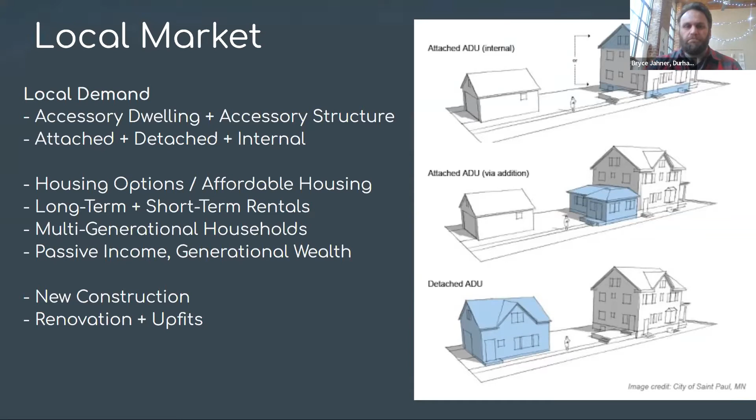So in our area, we've seen some barriers that we've had to overcome. I mentioned the zoning and the planning. One particular aspect that absolutely crushed our ability to do ADUs here was the way that the plumbing and the electrical could or could not attach to the main house. Used to be that it had to go have its own independent hookup at the street, which was an insurmountable bill right at the beginning of the build.

So now we have the ability to tap into the sewer of the house, and we also have the ability to just put a sub meter on the main electrical meter. So then the only upfit that might be necessary is getting a better panel if it's a particularly old house.

Our area also experienced really low demand right in the beginning, because there were very few people who knew what an ADU was. We also found that supply chain was a real big problem, getting just one product here, one product there, one door, just a singular single supply chain implement, I guess, along the way.

We also found that it was really hard to get our skilled labor force involved for such small projects. They were charging full infill housing prices for small, teeny little jobs, and that was really hard to get them on board in the beginning.

The other big option, and this is why I'm kind of excited for the next person to speak as well, is limited financing options. I think most banks have a real problem handling what the appraisal of a house looks like, or an accessory looks like in conjunction with the house.

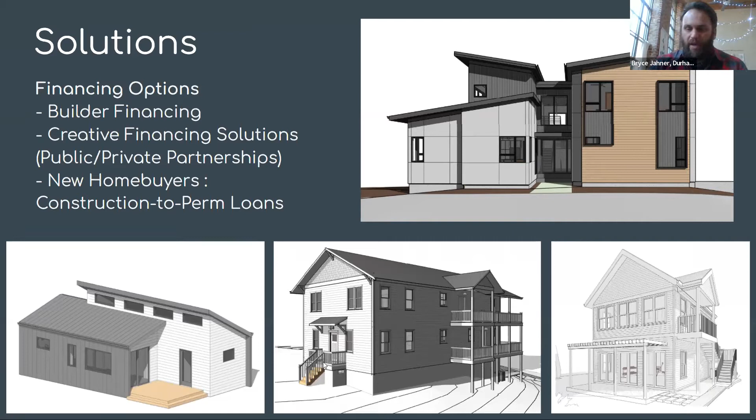This is the one that everybody at the beginning of the pandemic started to ask for, and is really, I think, probably our most in demand. I have a slide about it later, so I'll come back to it. Oh, it's the next one.

What makes this unique and so valuable is that it's a space that can be rented to a grad student, or in our area, a traveling doctor. It's also a space that's accessible to the couple who own the primary structure. So the first floor is a workout room. It could be an office. It could be a flex space for kids, a schoolroom. But then the top floor is a 1-bedroom, 1-bath.

That 1-bedroom, 1-bath really is what's in most demand in our area. We're finding it to be a much easier hill to climb to convince people that that's of value, especially people who live within a few miles of a school or a downtown urban corridor. But having that accessory space for their own private use really is something that everybody has latched onto and really, really loves.

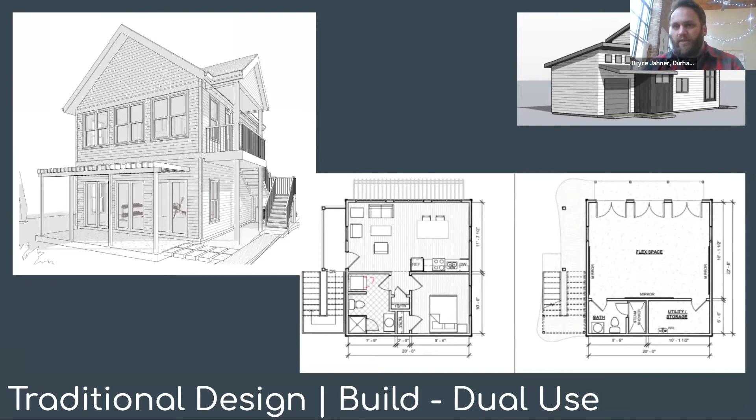In the upper right is an example of that, where somebody wanted to work in that space. On the left, she has her artist studio with a nice roll-up door to get the light in. But on the right, not one over the top but side by side, is the rental unit. That's an example of how that can look in a different format.

This is an example of one of our public-private partnerships. The city of Raleigh had some vacant land that they sold for $1 to a builder. We won that partnership with them, and now are building what's actually going to be 9 duplexes. The original intent was 8 duplexes, but it's now 9, all of which include an ADU built into them, typically off the back of the unit.

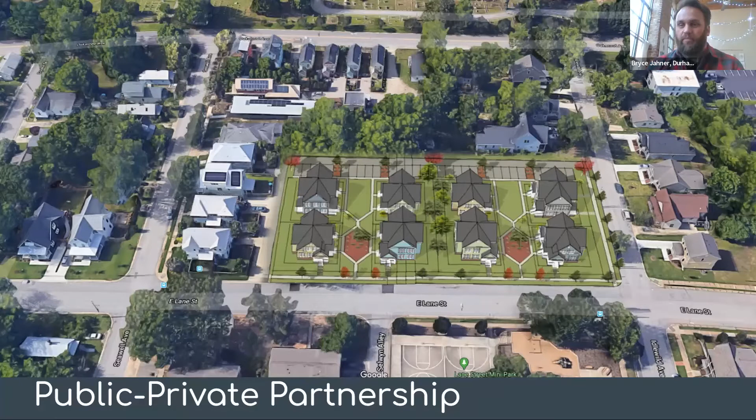This type of partnership makes land acquisition much more tenable, but also helps us produce these units or rent them at an affordable rate. We also work in conjunction with one of our area land trusts so that this is in a permanent affordability zone. This is another example of a partnership to remodel a structure rather than build one brand new.

This was a disaster house. It was in pretty rough shape. We partnered with an area nonprofit who houses homeless women. We got funding from the city and matched that with grant funding, and were able to add an ADU on this site for an in-house permanent supportive employee. Then 7 other rooms in the house are now currently housing women who are coming out of homelessness.

So it has a large kitchen for everyone to use, but has a separate kitchenette in the ADU. It separates it for security reasons, but also so they can have somebody living on site full time rather than off site just checking in every once in a while. This was one of our first ventures into what renovating a home with an ADU that didn't traditionally have one looked like.

In terms of the missing middle, this is housing that really maximizes density on a property without having to go through commercial or multi-level developments. All of these front lots are considered small lots in our area, which is something we recently passed zoning on so we can develop these smaller lots, all of which include an ADU on the back.

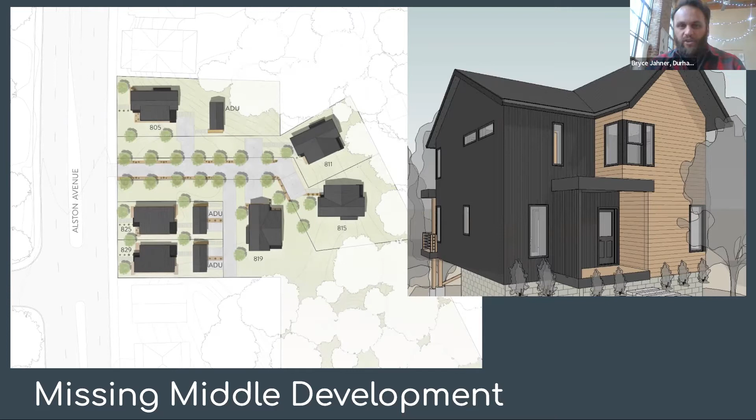Now these are ADUs that are modular developments, so we build them off-site and bring them on-site. I'll talk more about why that's a benefit later, but these are examples of ADUs put onto small urban developments.

Here are some other examples of ADUs in our area. The one on the top right is more of a luxurious ADU, a 2-bedroom, 2-bath with a screen porch and a nice fireplace. This is substantially nicer than the primary structure in front of it, but the couple who own the house are going to move into this structure and rent out the house in front. They really wanted to push the limits of how great this space could be and how maximized it could be in square footage and usage.

And the lower left is another example of an accessible unit. This is 2-bedroom as well, and includes a lot of extra amenities for someone in a wheelchair or a senior.

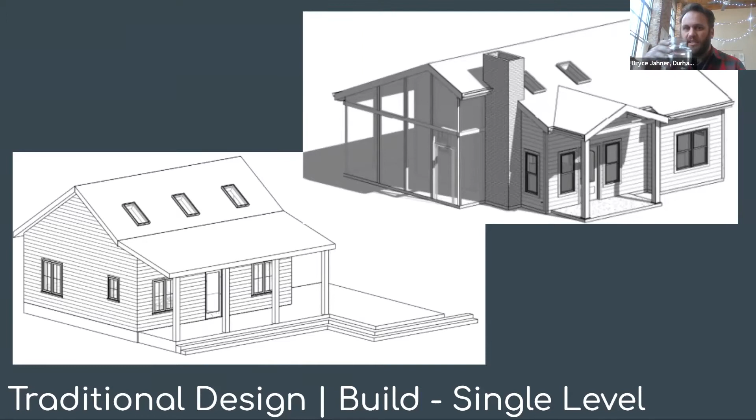This is sort of a hot button issue, I guess, but is another solution for accessory spaces, and from a builder's perspective is actually really easy: a tiny house on wheels. A lot of areas don't allow for these because they can't figure out how to not make trailer parks happen in their zoning without allowing for these as well.

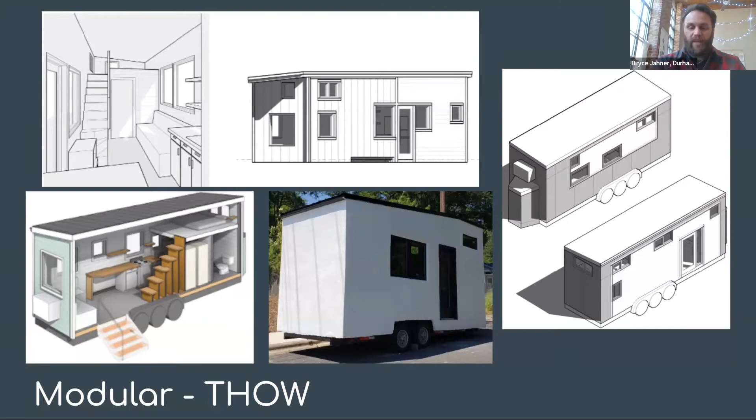But on the West Coast, up in the Rocky Mountains, in Maine, Vermont, these are wildly popular. And as we see more TV shows that talk about these, I think they're becoming a great solution especially for younger people and singles. We've built several of these. They're really low barrier, low cost options, and can be a great solution especially for small backyards and rural areas. You see a lot of them in rural areas.

Modular was a solution for us because one of the more common problems people have with ADUs is that you're disrupting their space—disrupting where they live to build this, whether it's 5 months of digging up someone's backyard, spending time in someone's basement, or moving through their space up to their attic. A lot of people find that to be a barrier for themselves.

So modular units are developed in a factory and then shipped to the site. They custom build a little trailer, we drive it in, set it down, and basically walk away. We're only on site for less than a month.

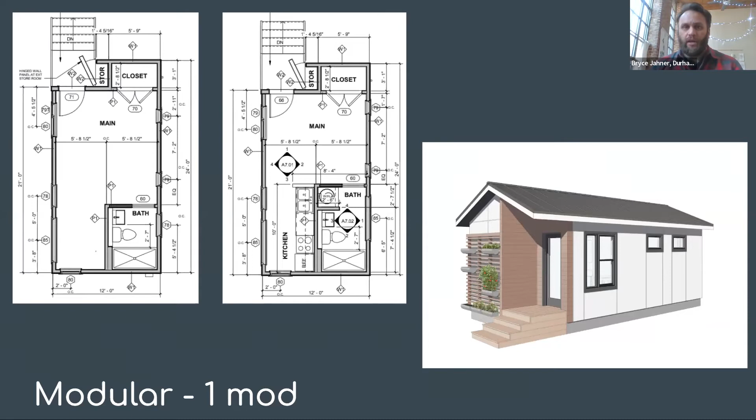There may be modular developers in your area. I know Indiana is sort of a hub of modular development, so there are probably a lot of companies that will come into Kentucky. This is something to consider as a really quick, easy, turnkey solution without having to go through the headache of doing a new build.

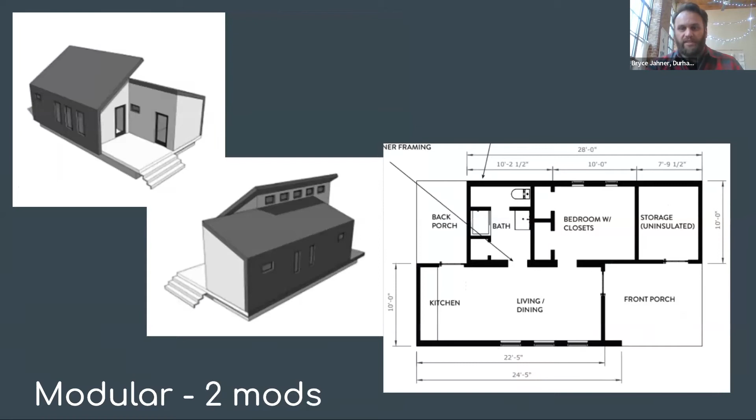Here's an example of 2 modules coming together. This is the space I mentioned before that is ADA accessible. And here's another example of a multi-module development—3 modules coming together, a little more complicated, but this one's in Raleigh now, or will be soon. I have more pictures of all these on our website, which I believe Valerie made or posted somewhere, so you can see more pictures about all these as well.

And that's the end of my overview of the different options that we have. I've talked pretty quickly through there, so I'm hoping we have some questions we can dive into one of those areas a lot quicker. I was going to talk for 40 minutes but got to 30, so hopefully we can have some back and forth now.

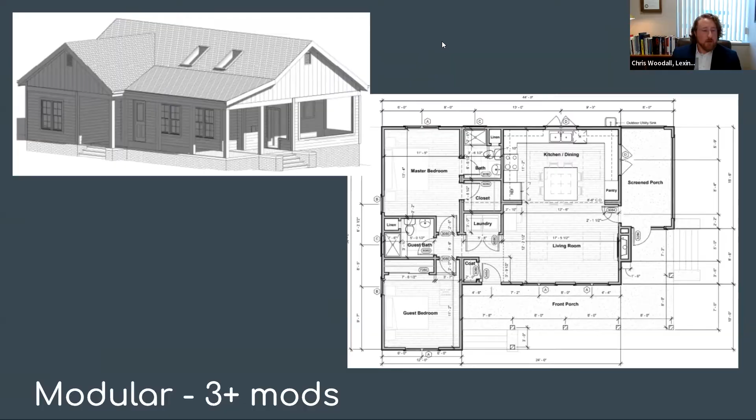Sure, Bryce, thanks for that. We've had several questions come in here. One that just came in—you were talking about ADA accessible, and we talk about universal design and barrier-free entries and those types of things. Specifically here in Lexington, we've done a lot of discussion about aging in place. How many of the ADUs you're seeing are designed with that in mind?

I think that early in the pandemic, we saw very little demand for that.

I think that was mostly because of education. Now we're seeing a lot more demand coming in from retirement communities, people wanting to get out of those dense environments. I'd say roughly half of what we're building now is universally designed. There are a lot of people moving into our area from out of state who are hoping to bring their parents along eventually, so that multi-generational living is really becoming pretty critical for us.

Designing for single level units, it's really easy to include a lot of accessibility features. When you get to multi-level, I think it would probably price most people out of that. But those single levels, especially since you're doing it in the backyard, give you a lot of ways to easily connect to a porch or a patio without huge ramps everywhere. That has been a really good solution here.